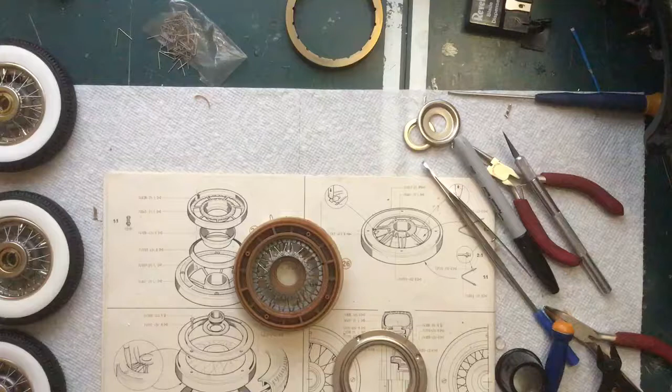I just wanted to do a quick update on where I am. I'm still working on wheels. I have 3 done now. Actually, the third one I did from the last video is so far not the nicest of the 3 I've done. It's good enough, but if you really look at it closely, you can see a few little issues with it, but it's fine.

The 4th one I'm working on here is actually so far turning out to be one of the nicer ones, one of the better ones. It looks like a mess around here because I put some CA around this edge.

I don't really trust those little screws in the plastic, because on other areas of the car I have broken the screws screwing them into plastic. They're just plated brass. There's been a few times where as I'm screwing them in, they're not even in all the way and they just snap in half. So I don't trust the strength of the screws, and I don't trust it because of the age of the plastic. When plastic gets old, it gets brittle. I don't fully trust those 4 little screws to hold this together for the life of the car.

I found a clever little cheating way to get those screws in, because I found they would go in about 3/4 of the way and then stop wanting to go in. I was afraid if I cranked too hard I'd break them, but typically it would strip out the slot for the screw head. So on the 3rd wheel I did—I don't remember how I did the first 2—I started cutting the screw down, cutting off the last 4 or 5 threads, filing the end so it was smooth, and then screwing them in that way.

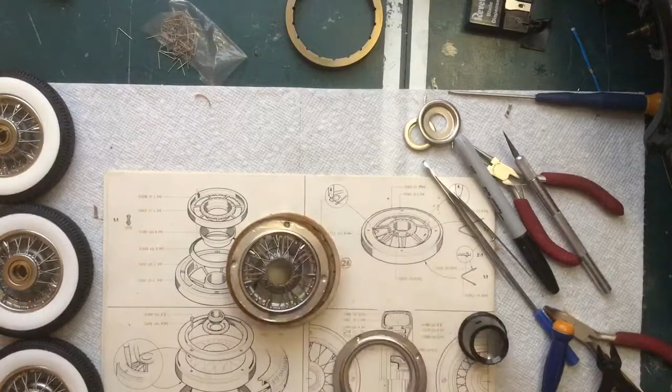And I kind of lied to you guys last time. I mentioned, as you can see, I've got this top part here done, and I just started the bottom side here. But I think I said in one of the last videos that for this bottom ring I didn't have to change the diameter. For some reason I was remembering wrong—I was thinking of the first 2 wheels I did, which I made a couple of years ago. This project has been sitting here for quite a while.

But I remembered, for some reason, those others didn't need that. But on that third wheel I did, and just test fitting this one, I do have to go in and squeeze those. Just to refresh your memory, it's taking a socket on some water pump pliers and going in, gently squeezing all the way around.

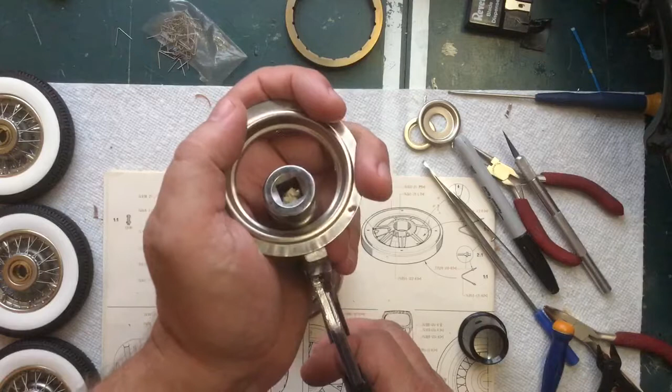Now when you're doing this, when you squeeze it, it's a tiny amount. You should barely see it move at all. And when you take your next step around, it's a tiny step. If you take big steps like this, it will leave a waffled or scalloped edge around here. You don't want that. So tiny squeeze, tiny rotate, squeeze, rotate, just tiny amounts all the way around.

You do it a little bit and then trial fit it, take a look at where it needs to be adjusted, fine tweak, adjust those, and keep fitting and adjusting. You don't want to go too far. If you go too far, it's too hard to bring it back out.

Also on the lower parts here, I've noticed, and I do remember noticing this on the first few wheels I did, I just kind of forgot about it. But the little pieces here, the geometry is off, so they don't go in all the way. So when you press it down, it's like one edge.

Like you can see, let me get something else to point with here. For example, on this one, that ridge—come on, cooperate—that ridge here barely grabs the plastic, whereas that ridge over here is deep into the plastic. It's like the angle of this isn't quite perfect for that.

So what I did on some of these over here was I actually shaved in right here. I sliced in a little bit here to get that edge into the plastic a little bit more. Maybe that one's a little more obvious here. I shaved that edge to get that into the plastic a little bit more.

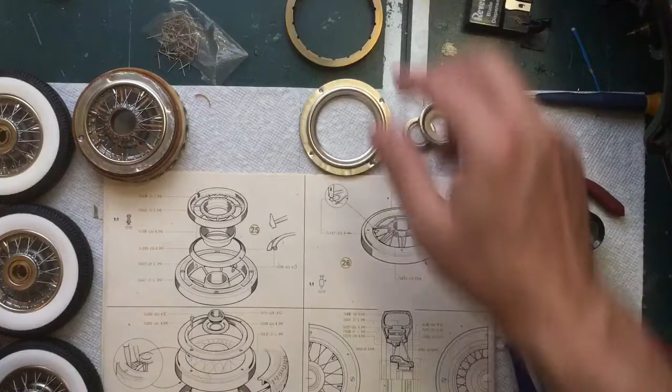There's another wheel I want to talk about, and that is the steering wheel. This is the kit steering wheel, and over top of it is this piece right here. I actually had to look up what this is because I didn't know — it's a horn ring. So this part around here is the horn, I guess. If any of you know better and I'm wrong, please put a comment in and let me know. But I believe that this is the horn — you press on that ring to blow the horn.

I don't know what this is right here. I'm not sure what that is. I don't know if it's for a turn signal or what. If you know, please comment and let me know what it is.

This is what Pocher gives us for that, but that's not what the real car looks like. This is what the real car looks like. So I want this to look more like the real car, so I made my own set.

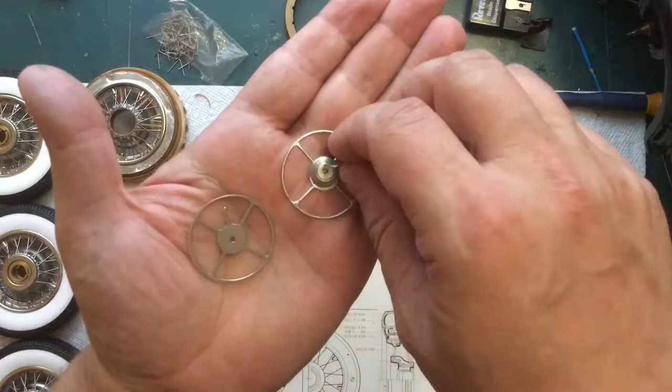What I came up with were these pieces right here. That's the kit version, and this is the one I made — it sits on here like that. The way I did this, it's just made out of brass. I took some brass wire and a piece of brass I cut into a circle and drilled a hole. The back side looks a little messy — that's where I soldered everything together on the back side.

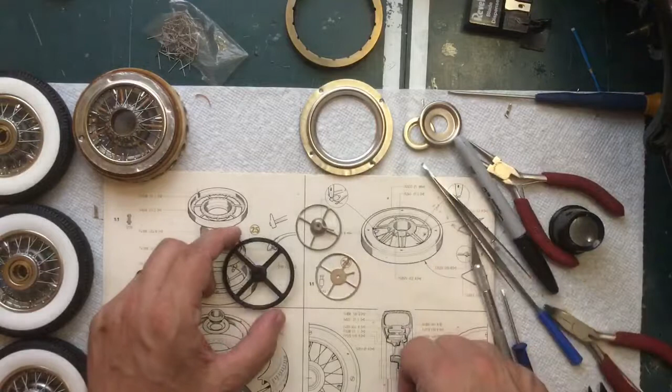This is also brass. I turned a chunk down on the lathe and then soldered a little tab on it here. As for what this is plated with — one of these days I would like to get into nickel plating. The process and supplies for nickel plating aren't that expensive from what I've seen, I just haven't gotten the stuff yet. Maybe possibly chrome plating too, but from what I've read, chrome plating can get kind of nasty with the leftover chemicals and trying to properly dispose of everything.

So what I did for these brass pieces was use this stuff right here. It's called liquid tin. It's a clear liquid, and when you put brass or copper in it — I think it works better on copper actually — it coats it with tin. It's a chemical reaction between the chemical in here and the copper, and it puts a thin layer of tin coating on it. That's what this is right here.

This is the first time I've ever used this stuff. It doesn't seem like you can get a really high polish on it — this is about as polished as I could get it, which is not as shiny as the kit parts. But when you look at photos of the real cars, as best as I can tell, they're not chrome shiny like this — they're more like dull shiny, as best as I can tell.

Now the thing with this liquid tin is when you put your brass parts in it, it's not like the longer you leave it in, the thicker the coating gets. That's not what it does. This has a chemical reaction with the... at least I'm assuming it's a chemical reaction. If I'm wrong and you know how it exactly works, don't tear me apart too much in the comments. But when it reacts with the copper or the brass, it creates a thin surface coating of tin. Once the copper is covered, that reaction stops. So you could leave it in for a week and it's not going to get any thicker than if you left it in for 5 minutes.

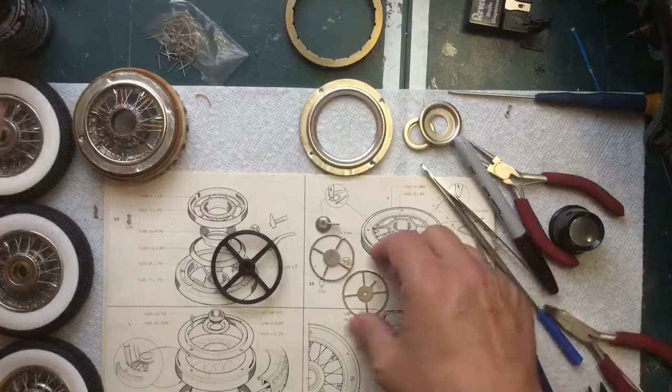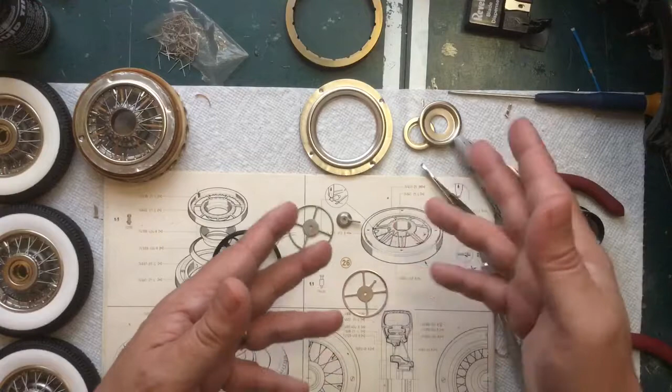Does that make sense? And I cannot figure out any way of polishing it more than I've already polished it, because if you polish too much, you'll wear through it, since it's a thin layer. You'll wear through and expose the brass or copper underneath of it. But still, just to get a non-brass look or a non-copper look, something to look more like metal or aluminum or steel, this is just a really quick down and dirty way to do it.

This stuff isn't super cheap. It's affordable, that's why I have it. I mean, stuff that's way too expensive, I don't usually buy. But you know, in a pinch, it works pretty decently.

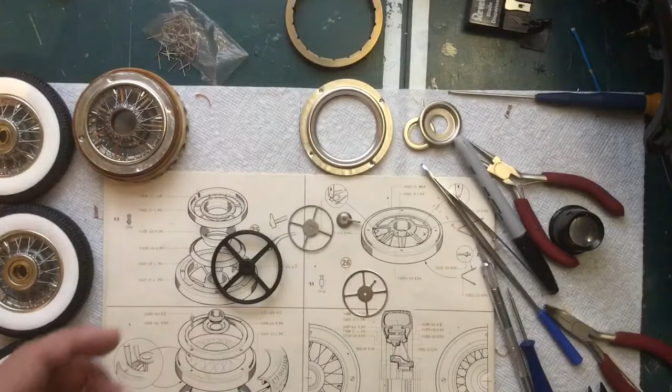So these are my new steering wheel pieces, and that hole actually threads onto the steering shaft that comes out of the instrument panel here. And I just think that looks more realistic than this one. Even though this one's more shiny, I think that one looks better.

Now my friend I'm building this for, he really doesn't care either way. I showed him these and he was like, ah, whatever. He goes, I don't care. And you know, it's kind of nice to be building a model for somebody like that, they're not in a rush to get it. He's told me more than once, he goes, I don't care if it takes you 10 years. On one hand, it's kind of nice not having a deadline, but on the other hand, it kind of sucks not having a deadline, because that makes me put it off more.

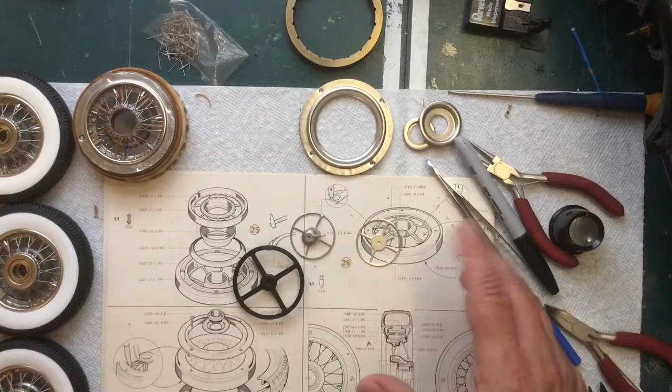Does that make sense? I feel like I've had this thing way too long already. I want to get this done sooner than later. I want to get this to him sooner than later. But it is nice that he's not really in a rush for it. So anyways, that's my steering wheel pieces. Those are pretty much all sorted, ready to go.

Like I said, I'm still building wheels. One of these days, I'm going to rebuild this, I'm going to restart this. And remember, one of the things I'm going to do here is cut a piece of mother of pearl. I have several pieces of this mother of pearl. Now, yeah, it's too short that way, but at an angle, it just barely fits. And if I go this way, I won't get too much of that brown in there.

I got 5 pieces of this. Some of them are kind of ugly, some of them look nice. I'll practice cutting the ugly ones first.

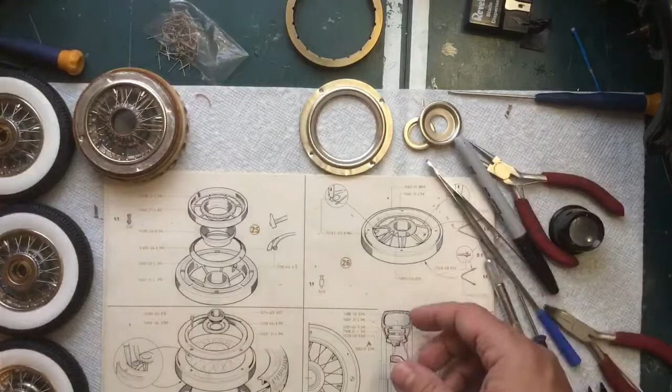I might start this sooner than later because I'm still waiting for leather. I'll be recovering all of this. That's already peeling off, I don't like the way some of these pieces are loose. I don't like the way that looks. So I'm still waiting for him to come up with some leather. Again, he's not in a rush, so I don't know if he's found any yet or if he's even looked for anything yet.

But I'm kind of getting to the point... I mean, there's still plenty I can do. I still need to work on fitting the hood panels a little bit better. I mean, they're pretty good now, but they could be better. I still need to work on the fenders a little bit. Again, they're okay as is, but they can be better. So there's a lot of little odds and ends I can sort out.

But I don't know when I'm going to get a chance to get another one of these Pocher build videos out. So I just wanted to give a quick update on where I was, show you what I did with the steering wheel, and yeah, so it might be a few more weeks before I get another Pocher video out. So we'll just kind of see how it goes.